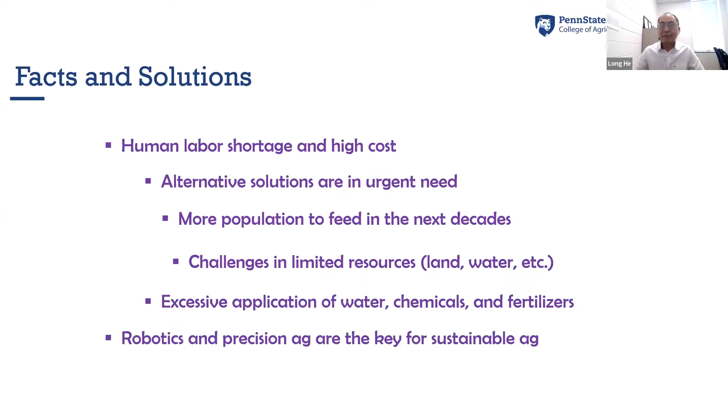For agriculture, robotics and automation has been widely used or adopted in agriculture. You can see examples like autonomous tractors for various field tasks. Tractors have been used for many years, but in recent years autonomous tractors have been introduced in the market and can be used for different tasks in the field, actually increasing efficiency and production.

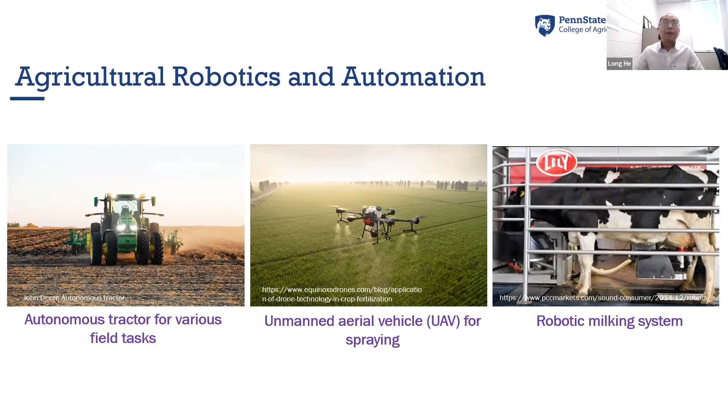The second example is unmanned aerial vehicles for spraying, another example showing automation helps increase farm efficiency. Of course, automation and robotics has also been used for animal agriculture, such as robotic milking systems and other robotic systems used in animal facilities. There's also a lot more robotic systems under development and testing.

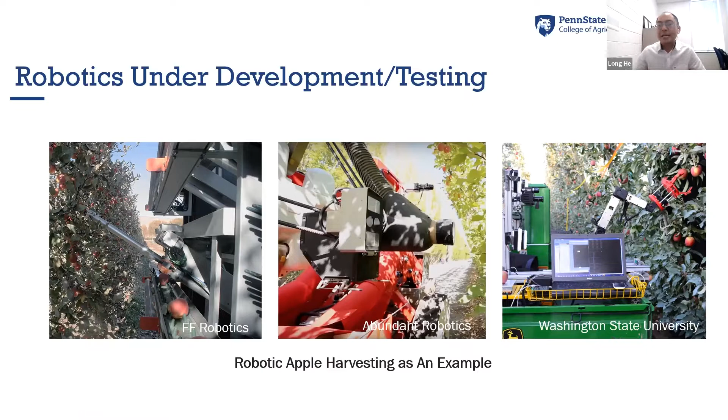Here, just taking some examples for apple harvesting, but there's many more. There are different types of robotic systems being tested for crop harvesting, pruning, and other field operations. Let's look at 3 different types of robotic harvesting systems for apples, from different companies and universities. There's many more under development and testing, and hopefully more will be in the market very soon.

So what are the core components in those robotics and automation systems? First, I want to point out agriculture system management actually is one of the major parts, because in order to implement robotic systems and other automation, we need to also think about using advanced agriculture system management.

Here, the picture shows a 2D dimensional tree structure that's set for apple orchards. Making this kind of tree structure will make it possible for robotic systems to access the fruits, branches, and other types of objects easily. So this is the first step to adopt a robotic system and some automation system for agriculture applications.

There are, of course, many more examples, like using aluminum beds for mushroom production, and there's also some hydroponic systems for vegetable growing. So those are also for advancing agriculture system management in order to adopt machinery, automation, and robotics.

Vision system is another component. For all agriculture operations, we need to target certain objects, whether for harvesting or pruning, we need to target fruits or branches. So first thing is we need to see them, we need to detect them and find where those are, and then we can do the operation. So vision system is the first step.

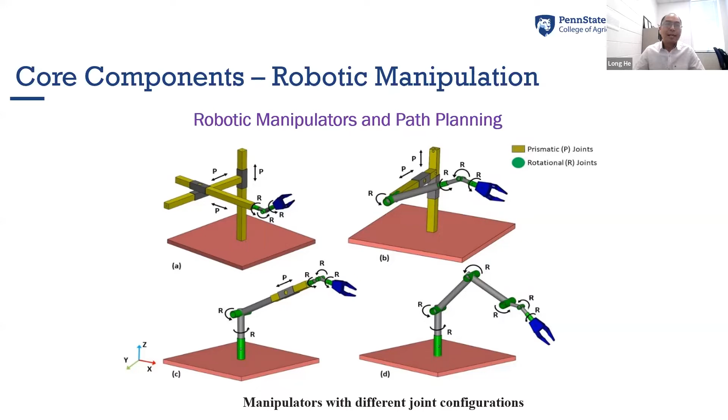Here I list a few examples, different types of robotic manipulators. It really depends on what kind of task operation you need, and then we can select optimal ways to do that. Next is the end-effector.

The end-effector is a kind of mechanism that actually does the actual work, whether picking fruits, removing mushrooms, or cutting branches. So it's a mechanism that can finish an individual or specific task.

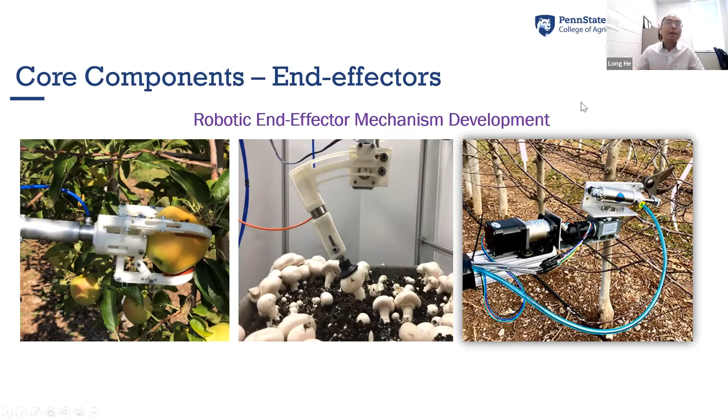You can also use unmanned aerial vehicles like UAVs for scouting the crops. Those can get a lot of information from onboard sensors and cameras, and also have proximal sensing using platforms driving through the field and taking the information as needed.

There's also in-field sensing, so you can place sensors in the field to gather all the information, which can be called the big data of agriculture. You have a lot of data representing the field and the crops, and to use that data we need a decision support system that can utilize this data to come up with strategies to manage the crop.

The Internet of Things is another technology that can be used for precision ag and automated applications. IoT is more about connecting all the physical systems and data through the internet, which can be used for remote accessing the data and also for automation.

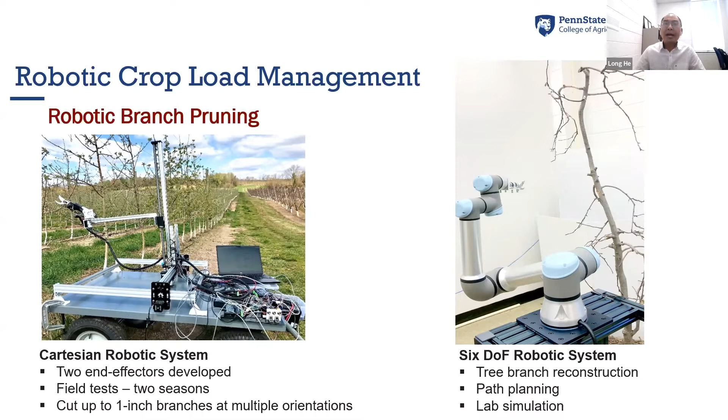Later on, we also tried attaching this end-effector cutter to a 6-degree-of-freedom robotic arm, more like an industrial type of robotic system. We also generate the path to target the branches, but this study is still going on, so we haven't achieved full automation yet. We have been working on path generation and end-effector development.

The second one, as I said, is at the blossom stage, the flower stage. First thing, if we need to thin the flowers, we need to see them. Using a machine vision system, we're trying to identify the flowers and flower clusters in the tree canopy. For this study, we're using a target sprayer system to spray the flower clusters as a target to thin the blossom and reduce the number of final fruit sets.

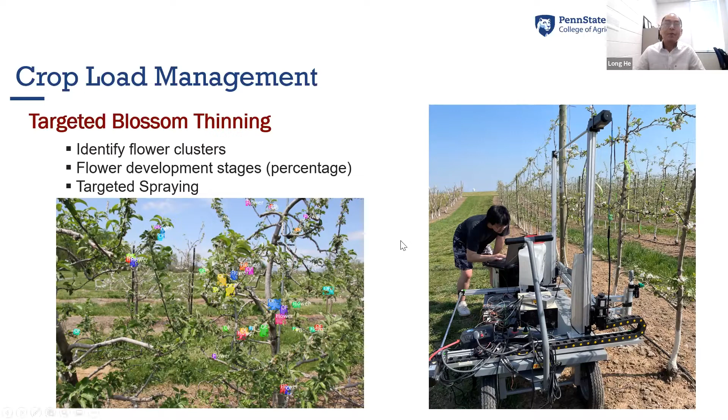Here we used deep learning algorithms to identify flower clusters. For example, if we identify these 4 clusters in the field, we use the developed robotic system to target those clusters and spray them with the chemical thinner.

You can see from there, we only spray those targeted flower clusters. We can save at least half of the chemicals with this kind of precision. So it is very important to get the flowers identified and then use the robotic system to spray more precisely.

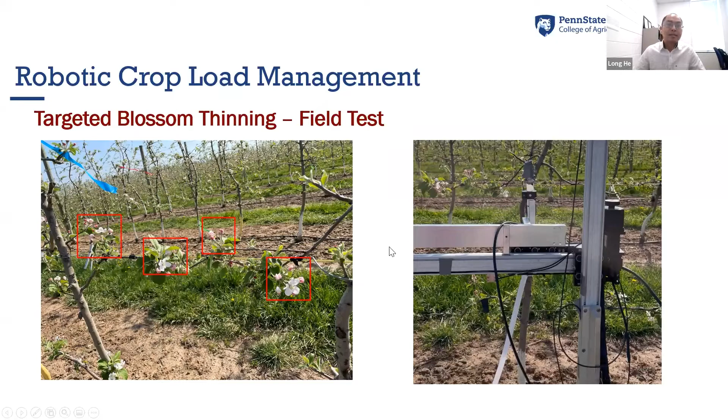The next one: if we still have too many fruits after blossom thinning, then green fruit thinning is the last step. We can adjust the fruit crop load.

The same idea applies, we need to identify the fruits and clusters. We use the machine learning method, the deep learning method I introduced earlier, using a Mask R-CNN type of deep learning algorithm to identify the fruits and stems. With this, we can know where those fruits are and eventually how many fruits are in the cluster and which ones we should remove.

Typically we want to keep the bigger fruits on the tree but remove the smaller ones. So it's important to get the location, sizing, and orientation of those fruits. We did some tests in the field and developed a mechanism to remove the green fruits. Later on, we also adapted this to a robotic arm to try to use a robotic system to remove green fruits.

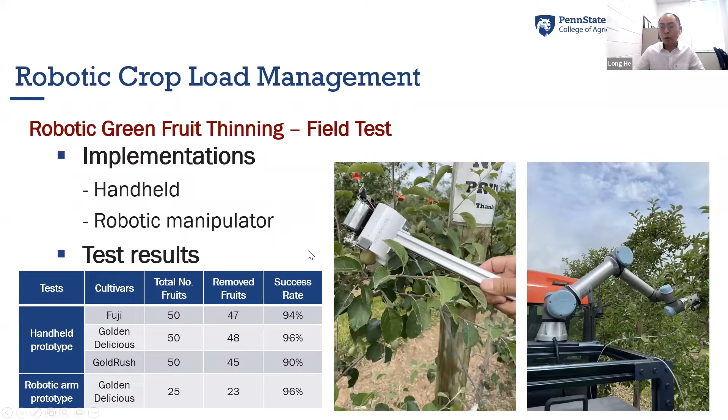Okay, that is the whole thing for the crop load management. I will introduce a few other projects that we are involved in, kind of robotic system and precision agriculture.

One is we did some study on robotic harvesting. We developed two types of end-effectors using a Cartesian robotic manipulator. We found it is very important to have a certain kind of motion to remove fruits, because you want the fruits removed without damage and also have the stem stay on. So the motion and mechanism of the end effector is a key part of that.

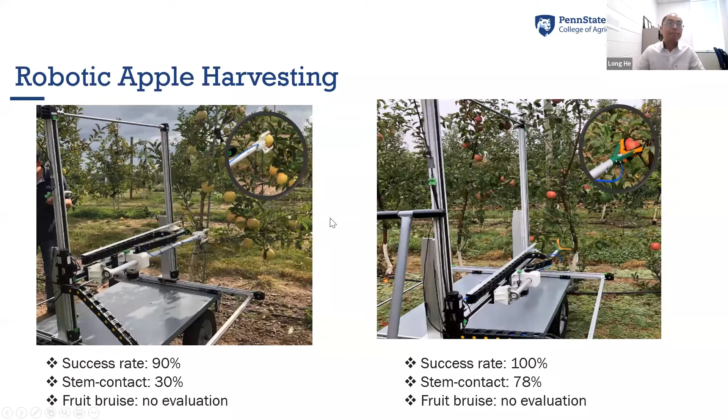So we didn't do too much on that, but we mainly worked on the end effector and the motion part. Robotic mushroom harvesting - this is a project we have been working on for a few years, and also in the next few years we'll keep working on it as another project.

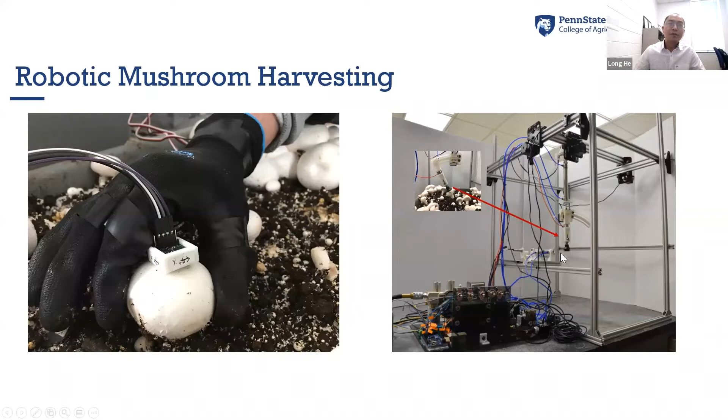For the precision ag part, we are mainly involved in two parts of the study.

One is for irrigation - that is for a precision and automatic irrigation system. This system uses soil water moisture sensors actually installed in the field. You couldn't see them, but we have data loggers and other controllers built together, and then we can actually access the data and control the water valves automatically.

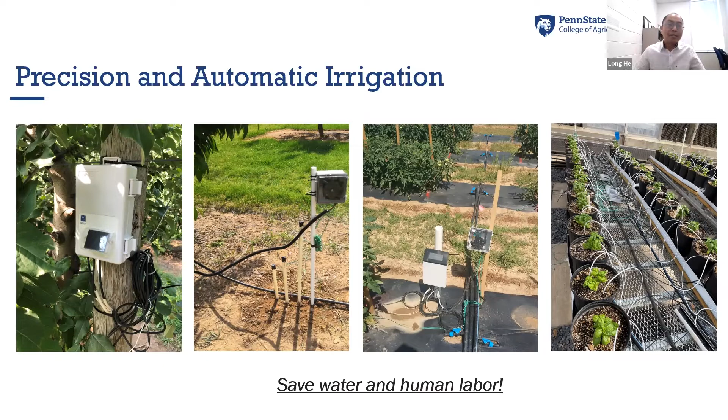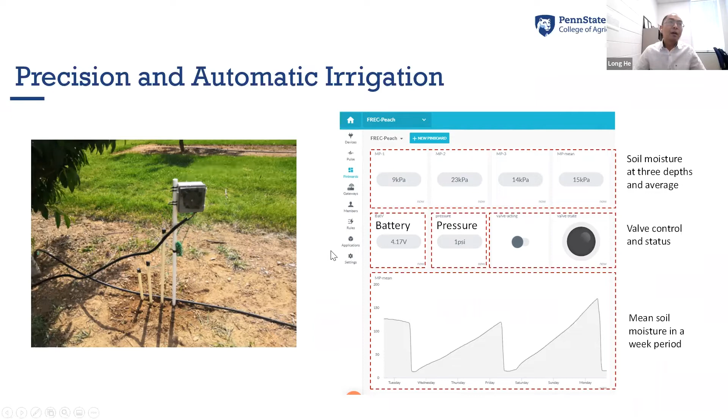Another example for precision agriculture is spraying. For orchard applications, we normally use air-blast sprayers. Normally, if we don't have any control, a lot of chemicals are sprayed in the air or on the ground. So there's a lot of waste there. So how do we reduce that kind of chemical waste and concentrate more only on the canopy, not on other parts like the air or the ground?

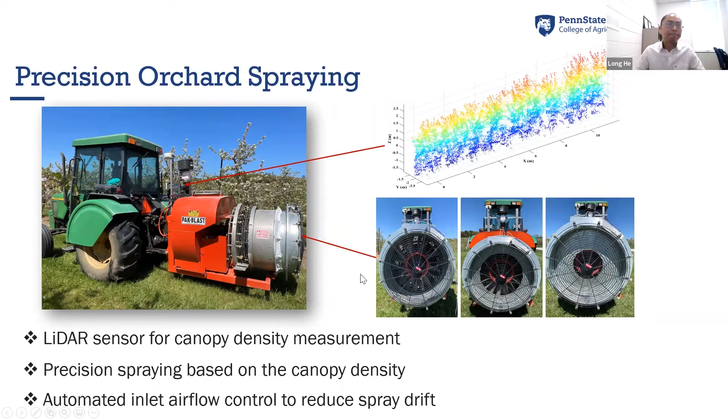UAVs have also attracted a lot of our attention. We used UAVs with different cameras, like the regular RGB camera and also multi-spectrum cameras, to help with crop health scouting. If you want to see your crop coverage, like what the canopy areas are, the density, and everything like that, we can use the UAV to scan in a very fast and efficient way. Also for disease detection and crop health monitoring, using UAV is a good option.

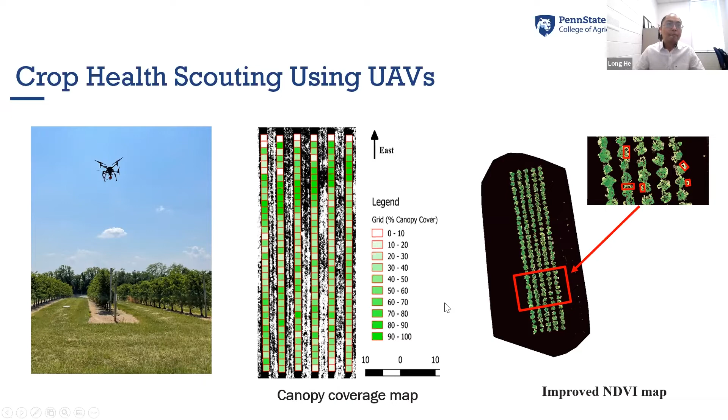So that's pretty much all the research projects we've done in the past few years. In the last slides, I'd like to look at some of the challenges and opportunities for integrated robotic crop production systems.

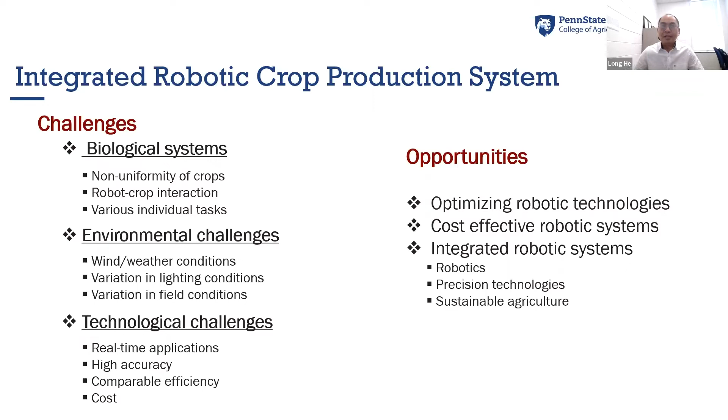We also need to think about cost-effective robotic system development—how to reduce cost and make it more affordable for regular growers to use these technologies—and eventually integrate robotic systems together, using robotics and precision techniques, sensing information from sensors, sending that to decision support systems, and having the robots finish the task. These ideas all point toward sustainable agriculture, and eventually we want to develop a competitive and sustainable agriculture system for the industry.

In my program, I've collaborated with many faculty and scientists within Penn State and beyond. Here are some names with a variety of expertise—for example in horticulture, plant pathology, entomology, plant science, and engineering. There's a lot of collaboration between myself and those folks, as well as with extension educators. There are also collaborations beyond Penn State—I've worked with Washington State, Cornell, University of Maryland, and USDA folks on these projects.

I think that's all for my presentation. I'll have time to take questions and discuss more details. Thank you.

That was terrific—it really shows there's a lot of technology being adapted to try to meet these labor and precision needs in agriculture. We had a number of questions submitted beforehand related to the big issue of costs: how possible is it to drop the cost to make this more affordable for growers of all sizes and operations?